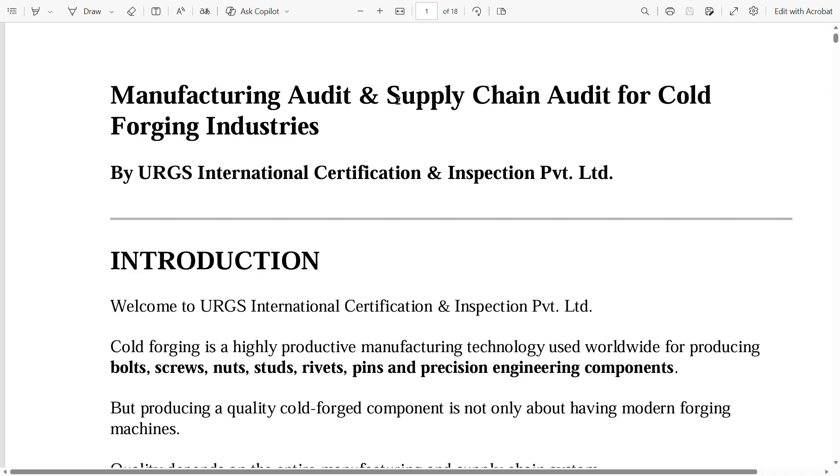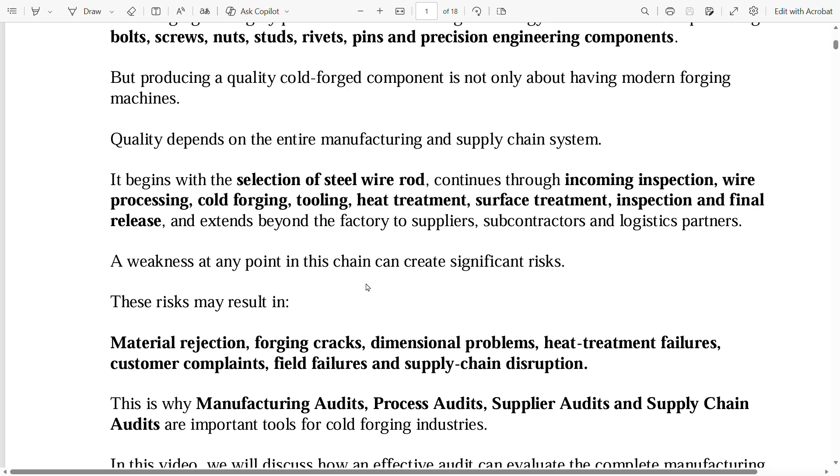Cold forging is a highly productive manufacturing technology used worldwide for producing bolts, screws, nuts, studs, rivets, pins, and precision engineering components. But producing a quality cold forged component is not only about having modern forging machines. Quality depends on the entire manufacturing and supply chain system. It begins with the selection of steel wire rod, continues through incoming inspection, wire processing, cold forging, tooling, heat treatment, surface treatment, inspection, and final release, and extends beyond the factory to suppliers, subcontractors, and logistic partners.

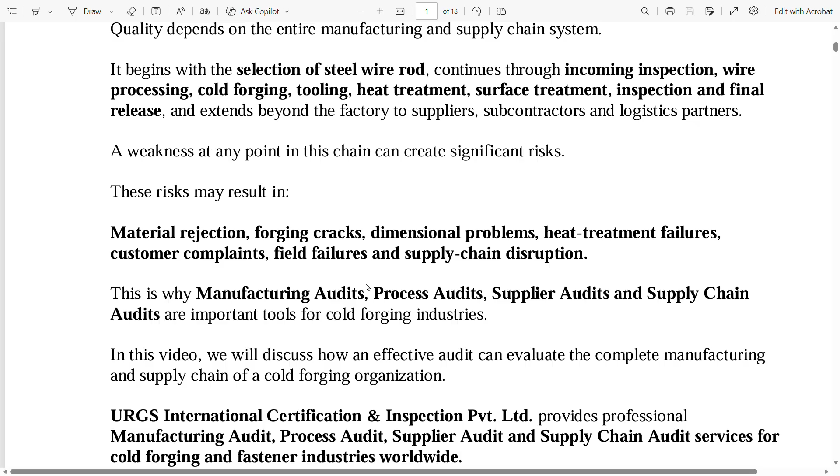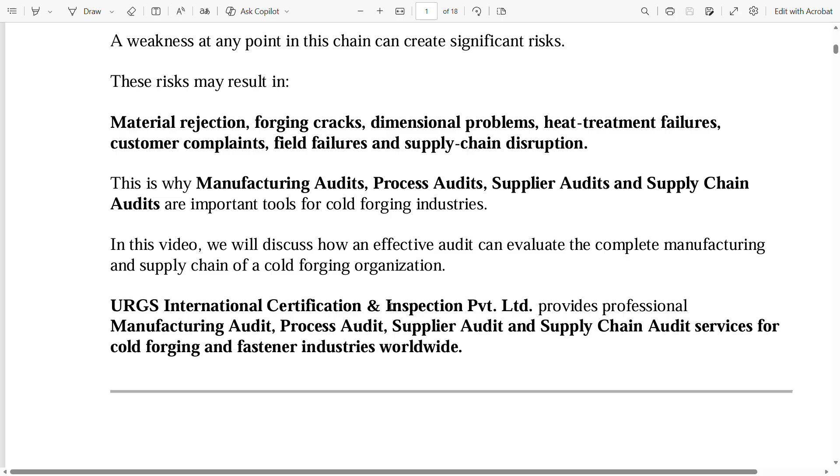A weakness at any point in this chain can create significant risks. These risks may result in material rejection, forging cracks, dimensional problems, heat treatment failures, customer complaints, field failures, and supply chain disruption. This is why manufacturing audits, process audits, supplier audits, and supply chain audits are important tools for cold forging industries. In this video, we will discuss how an effective audit can evaluate the complete manufacturing and supply chain of a cold forging organization.

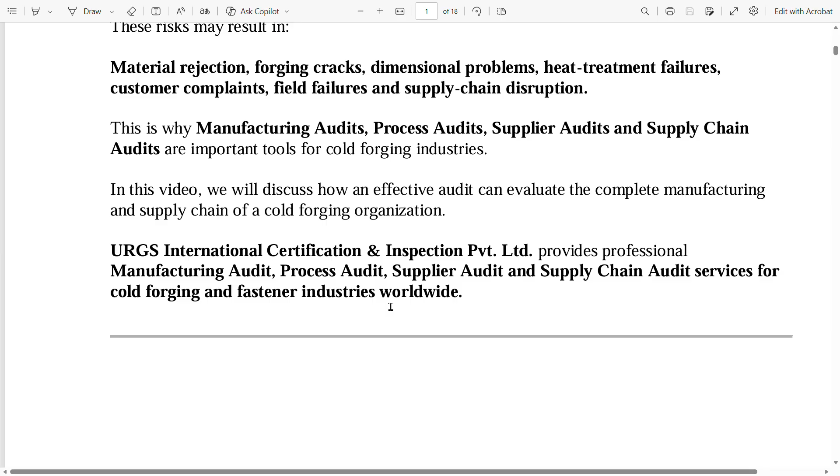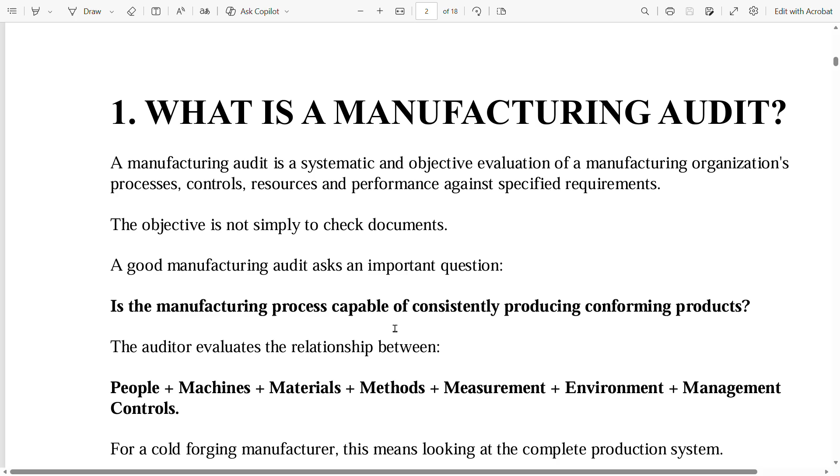What is a manufacturing audit? A manufacturing audit is a systematic and objective evaluation of a manufacturing organization's processes, controls, resources, and performance against specified requirements. The objective is not simply to check documents. A good manufacturing audit asks an important question: is the manufacturing process capable of consistently producing conforming products? The auditor evaluates the relationship between people plus machines plus materials plus methods plus measurement plus environment plus management controls.

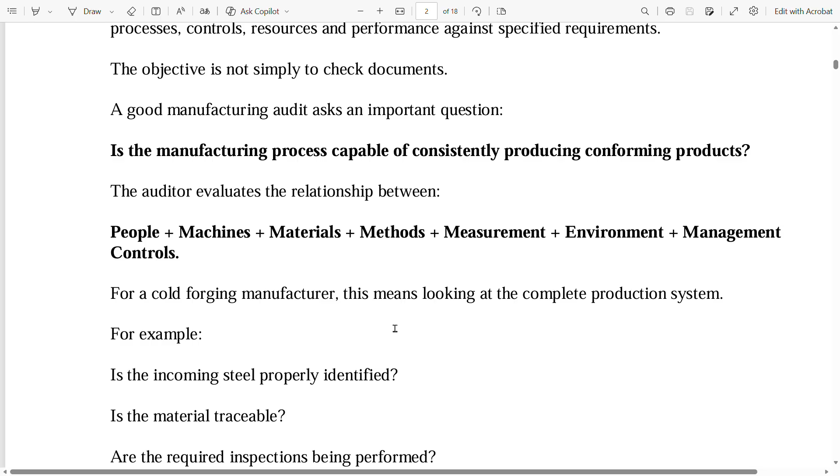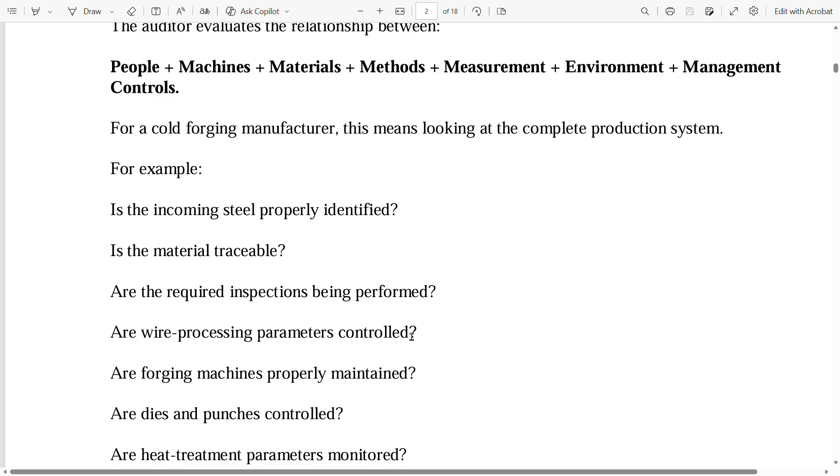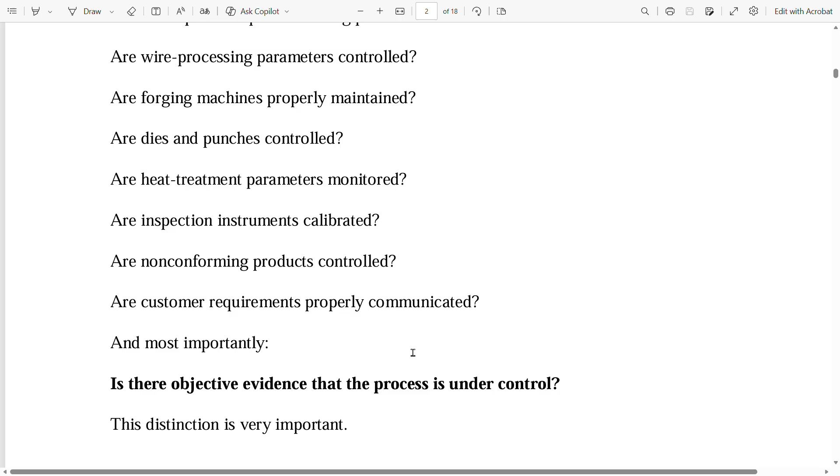For a cold forging manufacturer, this means looking at the complete production system. For example, is the incoming steel properly identified? Is the material traceable? Are the required inspections being performed? Are wire processing parameters controlled? Are forging machines properly maintained? Are dies and punches controlled? Are heat treatment parameters monitored? Are inspection instruments calibrated? Are non-conforming products controlled? Are customer requirements properly communicated? And most importantly, is there objective evidence that the process is under control?

This distinction is very important. An audit is not simply an inspection of products. An inspection determines whether a product meets specified requirements. An audit evaluates whether the system and processes used to produce that product are effectively controlled.

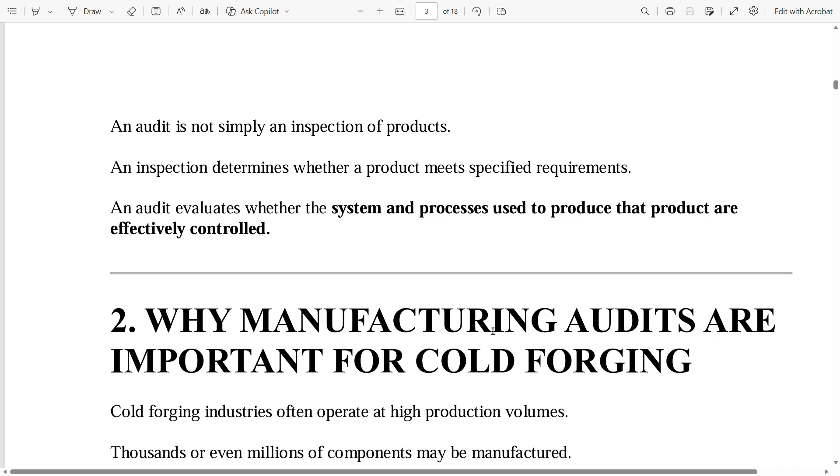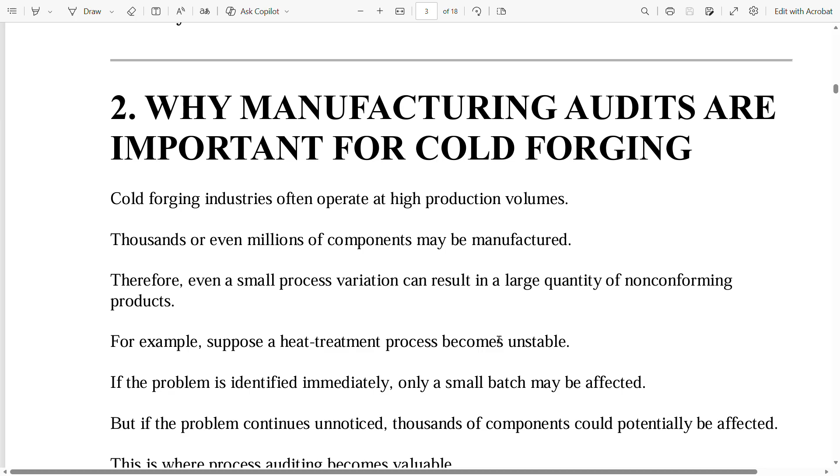Now next is why manufacturing audits are important for cold forging. Cold forging industries often operate at high production volumes. Thousands or even millions of components may be manufactured. Therefore, even a small process variation can result in a large quantity of non-conforming products. For example, suppose a heat treatment process becomes unstable. If the problem is identified immediately, only a small batch may be affected. But if the problem continues unnoticed, thousands of components could potentially be affected.

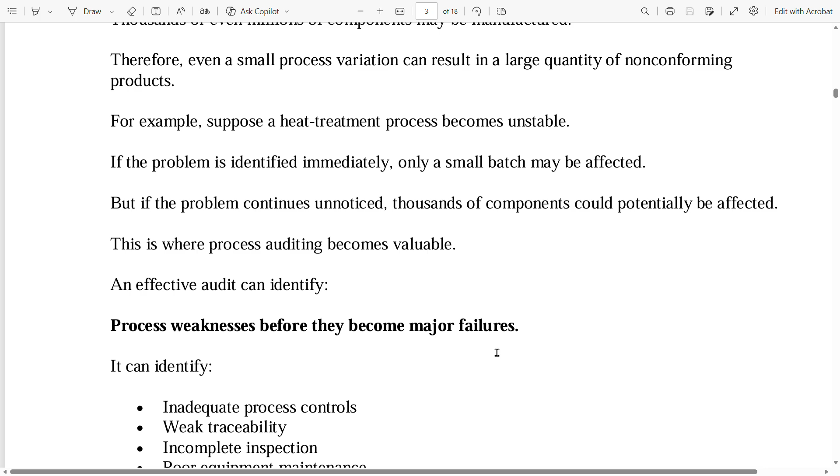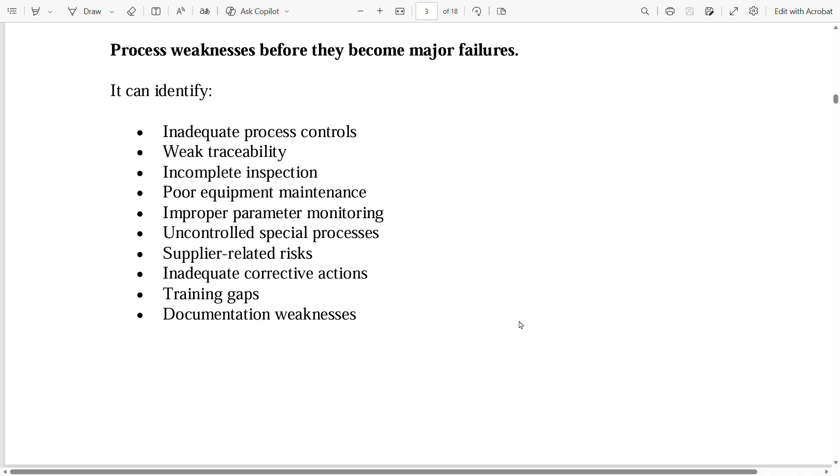This is where process auditing becomes valuable. An effective audit can identify process weaknesses before they become major failures. It can identify inadequate process controls, weak traceability, incomplete inspection, poor equipment maintenance, improper parameter monitoring, uncontrolled special processes, supplier-related risks, inadequate corrective actions, training gaps, and documentation weaknesses. The objective is therefore prevention rather than reaction. A strong audit system helps organizations move from detecting defects to preventing defects.

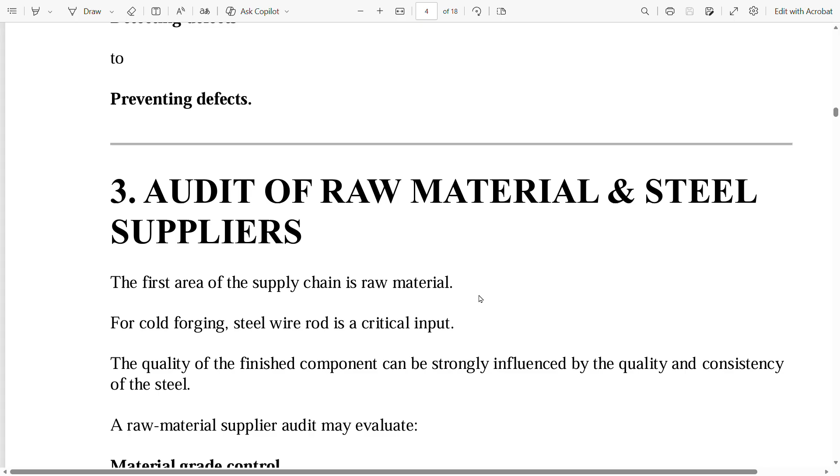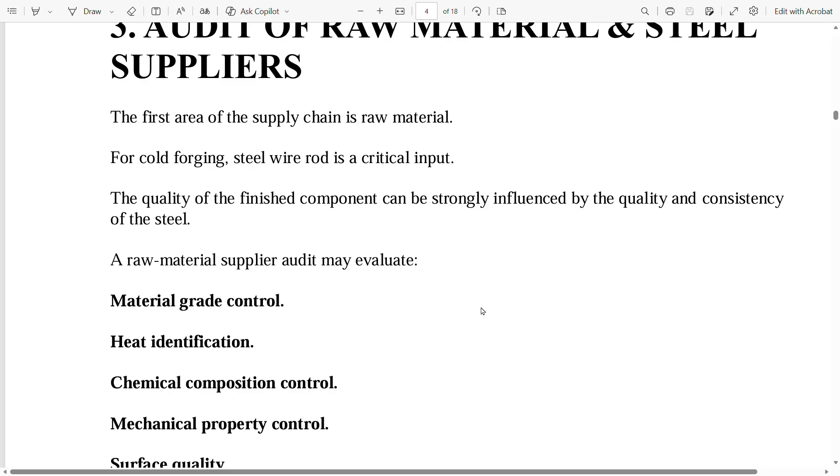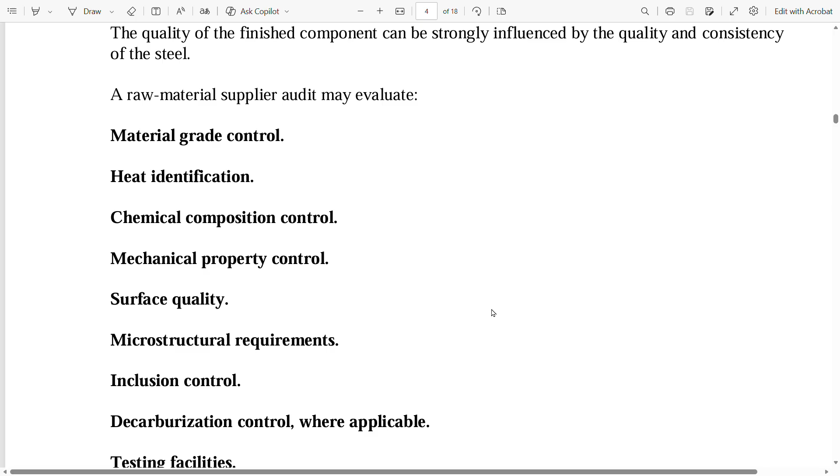The next is audit of raw material and steel suppliers. The first area of the supply chain is raw material. For cold forging, steel wire rod is a critical input. The quality of the finished component can be strongly influenced by the quality and consistency of the steel. A raw material supplier audit may evaluate material grade control, heat identification, chemical composition control, mechanical property control, surface quality, microstructural requirements, inclusion control, decarburization control where applicable, testing facilities, calibration of laboratory equipment, certificate and documentation controls, and traceability.

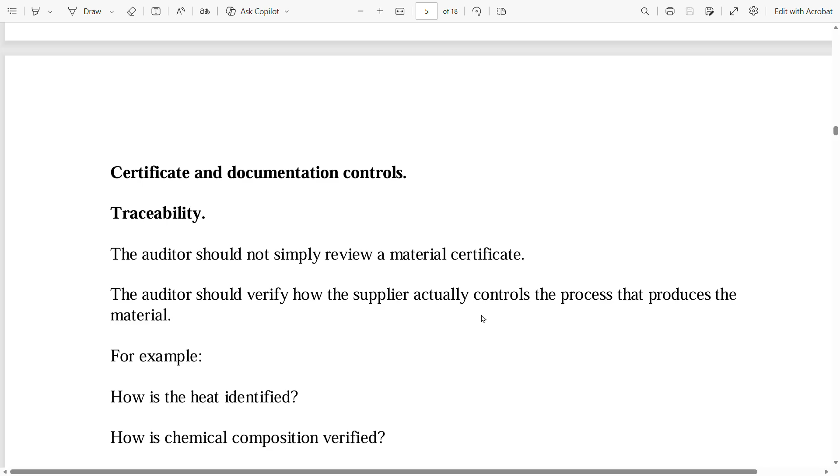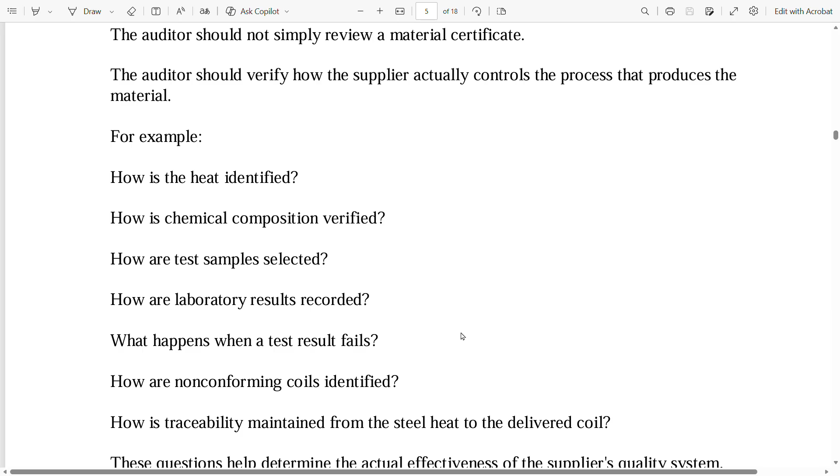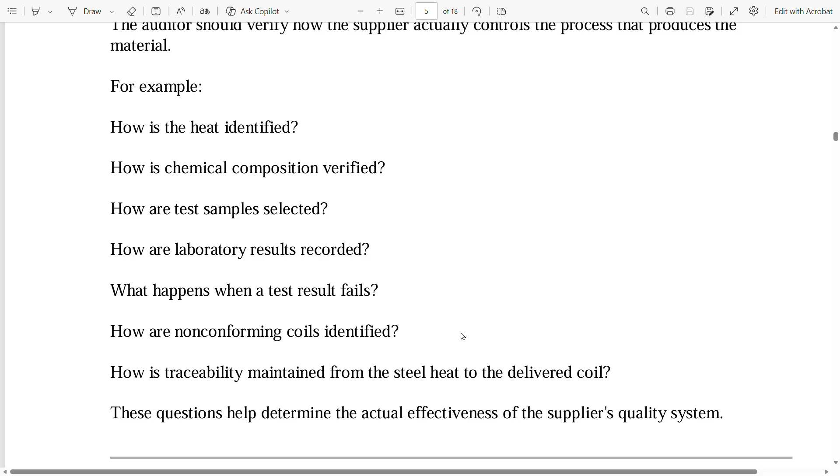The auditor should not simply review a material certificate. The auditor should verify how the supplier actually controls the process that produces the material. For example, how is the heat identified? How is the chemical composition verified? How are test samples selected? How are the laboratory results recorded? What happens when a test result fails? How are non-conforming coils identified? How is traceability maintained from the steel heat to the delivered coil? These questions help determine the actual effectiveness of the supplier's quality system.

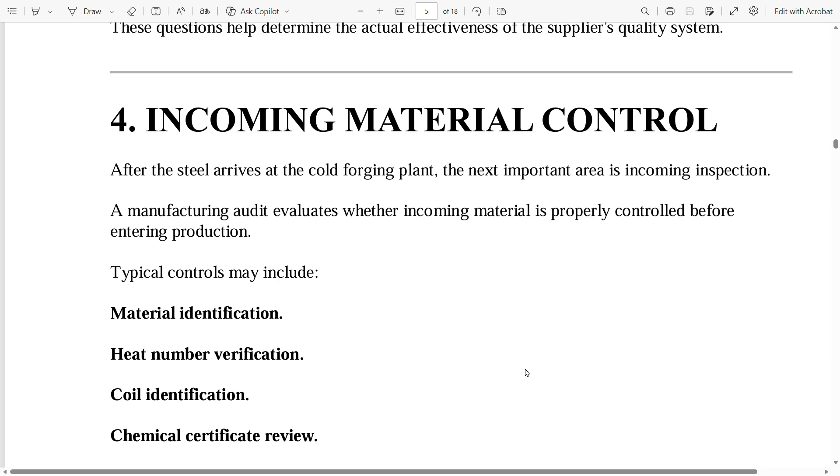Now next is incoming material control. After the steel arrives at the cold forging plant, the next important area is incoming inspection. A manufacturing audit evaluates whether incoming material is properly controlled before entering production.

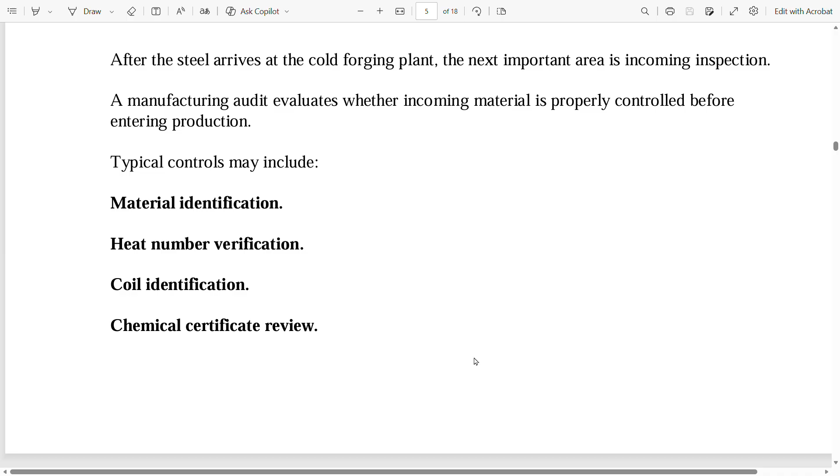Typical controls may include material identification, heat number verification, coil identification, chemical certificate review, dimensional verification, surface inspection, mechanical testing where required, metallurgical examination where specified, and acceptance and rejection criteria.

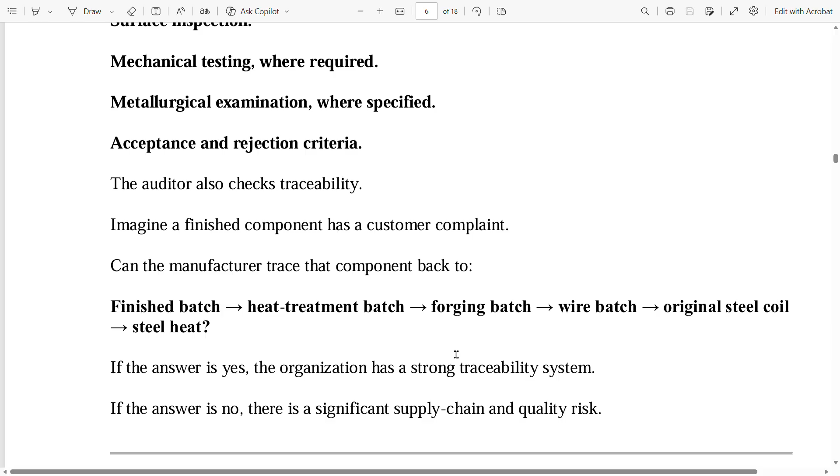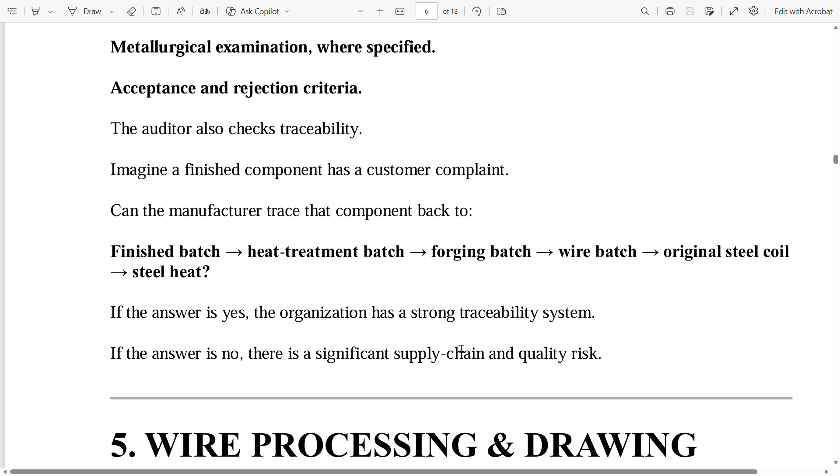The auditors also check traceability. Imagine a finished component has a customer complaint. Can the manufacturer trace that component back to finished batch, to heat treatment batch, to forging batch, to wire batch, to original steel coil, and at last to steel heat? If the answer is yes, the organization has a strong traceability system. If the answer is no, there is significant supply chain and quality risk.

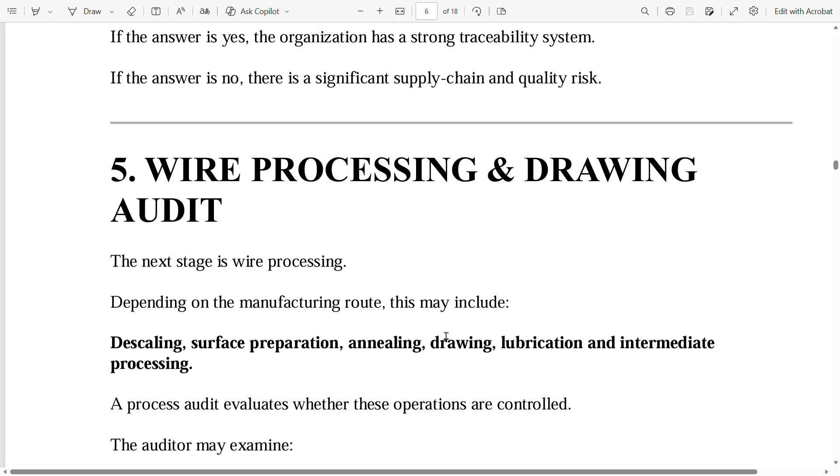Now fifth, wire processing and drawing audit. The next stage is wire processing. Depending on the manufacturing route, this may include descaling, surface preparation, annealing, drawing, lubrication, and intermediate processing.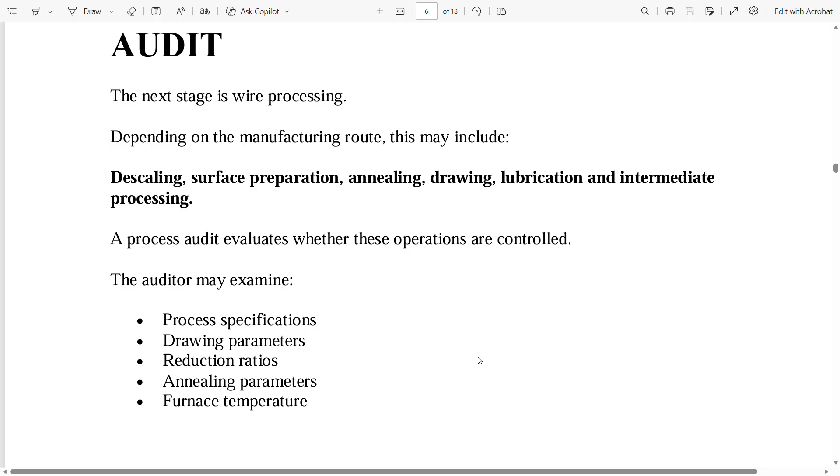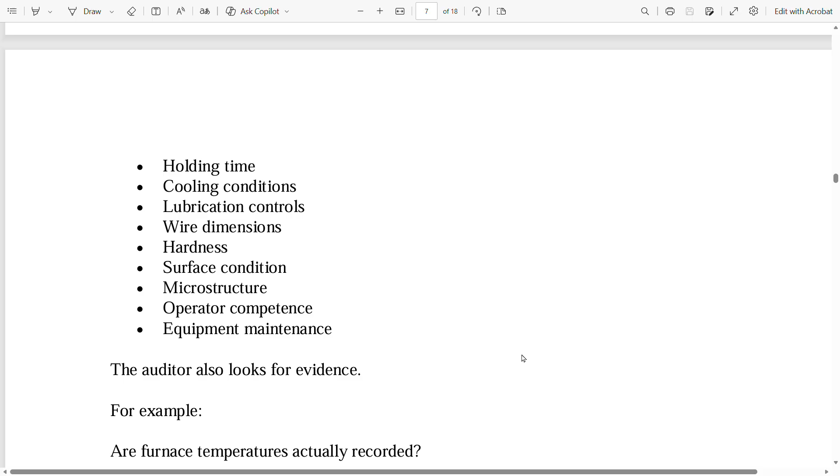A process audit evaluates whether these operations are controlled. The auditor may examine process specifications, drawing parameters, reduction ratios, annealing parameters, furnace temperature, holding time, cooling conditions, lubrication controls, wire dimensions, hardness, surface condition, microstructure, operator competence, and equipment maintenance.

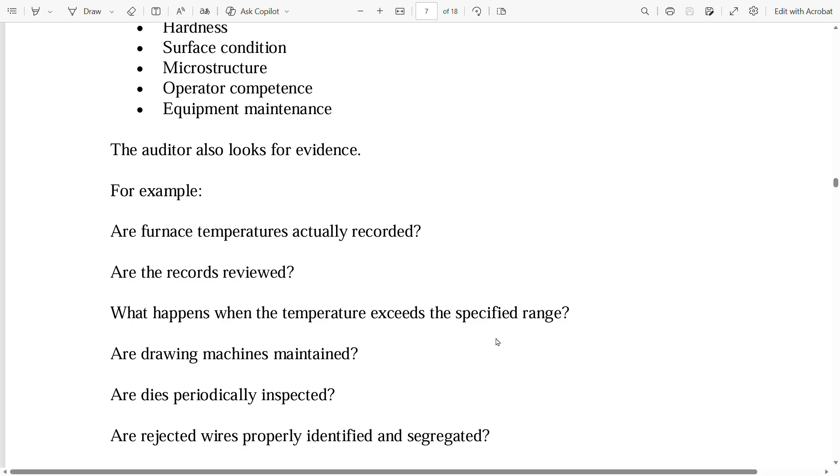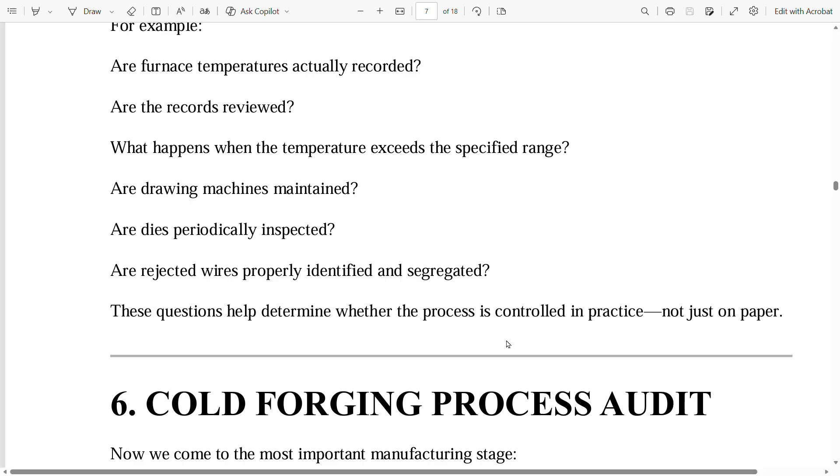The auditor also looks for evidence. For example, are furnace temperatures actually recorded? Are the records reviewed? What happens when the temperature exceeds the specified range? Are drawing machines maintained? Are dies periodically inspected? Are rejected wires properly identified and segregated? These questions help determine whether the process is controlled in practice, not just on paper.

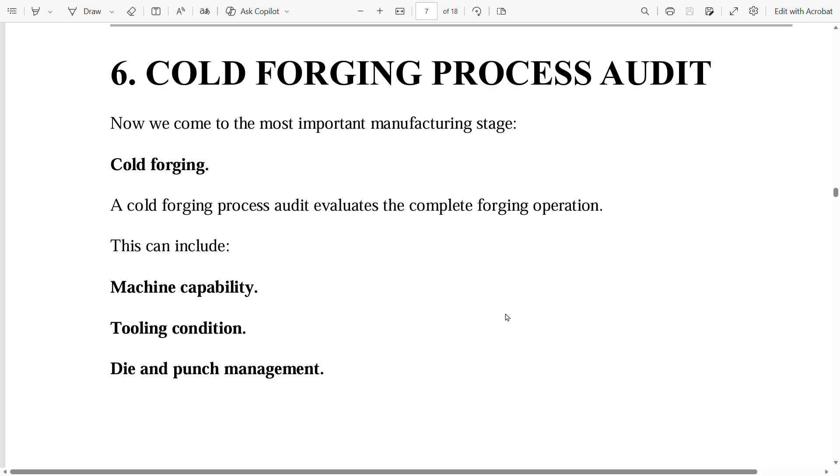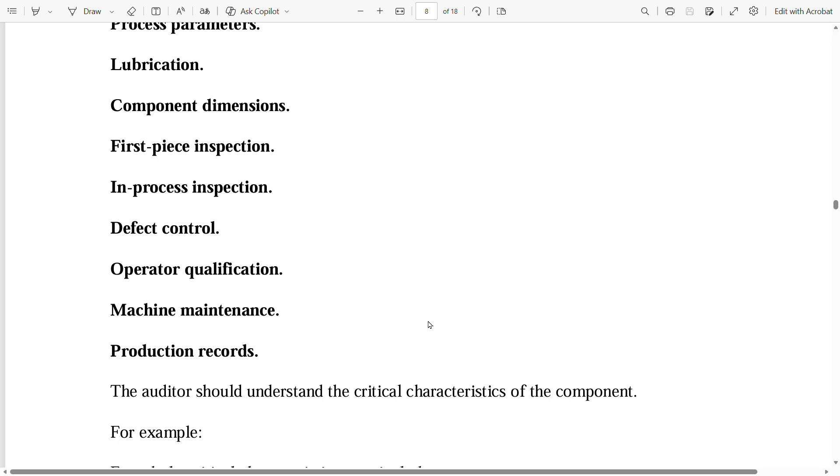Then next is cold forging process audit. Now we come to the most important manufacturing stage, cold forging. A cold forging process audit evaluates the complete forging operation. This can include machine capability, tooling condition, die and punch management, process parameters, lubrication, component dimensions, first piece inspection, in-process inspection, defect control, operator qualification, machine maintenance, and production records.

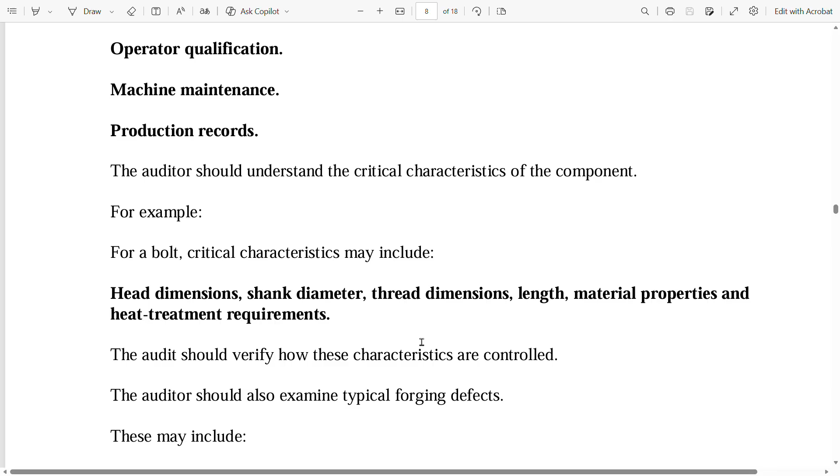The auditor should understand the critical characteristics of the component. For example, for a bolt, critical characteristics may include head dimensions, shank diameter, thread dimensions, length, material properties, and heat treatment requirements. The audit should verify how these characteristics are controlled.

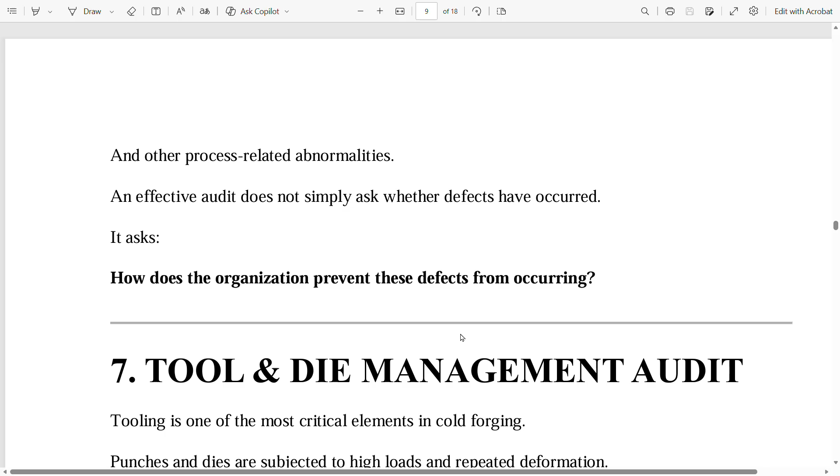The auditor should also examine typical forging defects. These may include laps, folds, cracks, underfill, overfill, surface defects, dimensional variation, and other process-related abnormalities. An effective audit does not simply ask whether defects have occurred, it asks how the organization prevents these defects from occurring. The next is tool and die management audit.

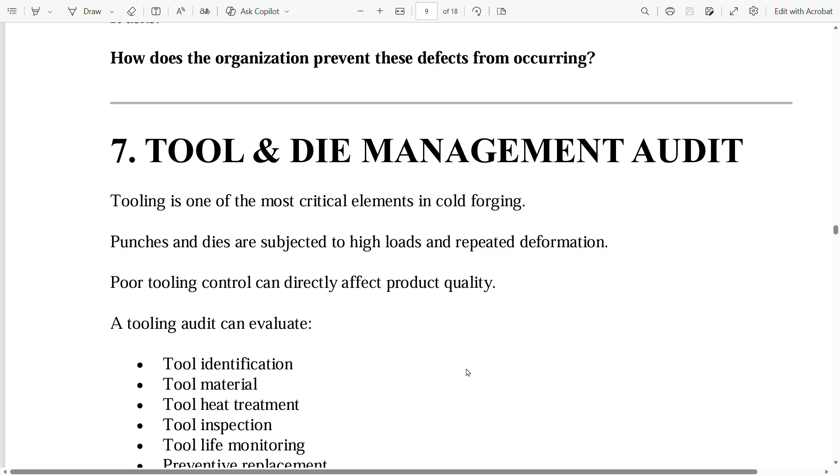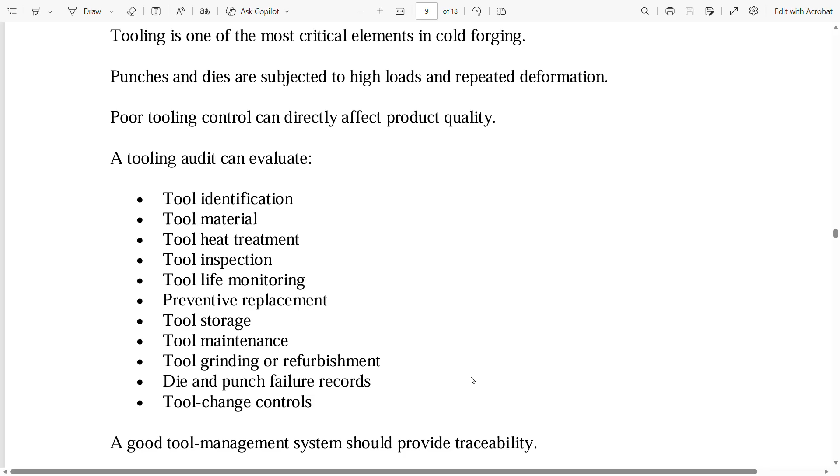Tooling is one of the most critical elements in cold forging. Punches and dies are subjected to high loads and repeated deformation. Poor tooling control can directly affect product quality. A tooling audit can evaluate tool identification, tool material, tool heat treatment, tool inspection, tool life monitoring, preventive replacement, tool storage, tool maintenance, tool grinding or refurbishment, die and punch failure records, and tool change controls.

A good tool management system should provide traceability. The organization should know which tool was used for which product and for how many components, when it was inspected, when it was replaced, and why it failed.

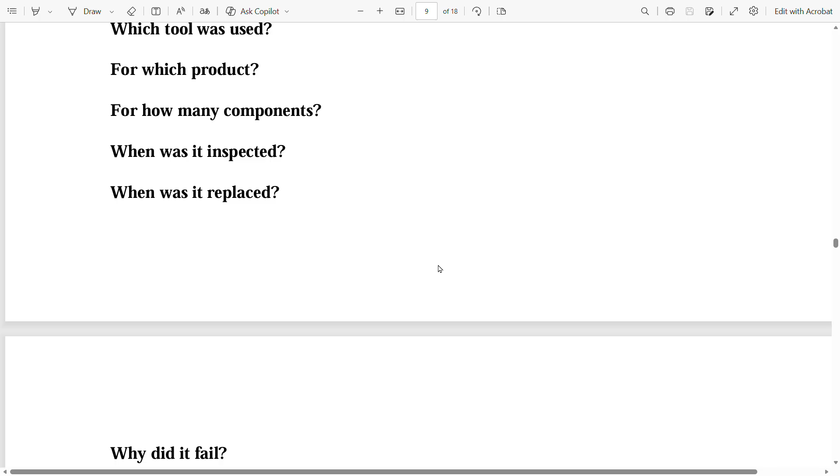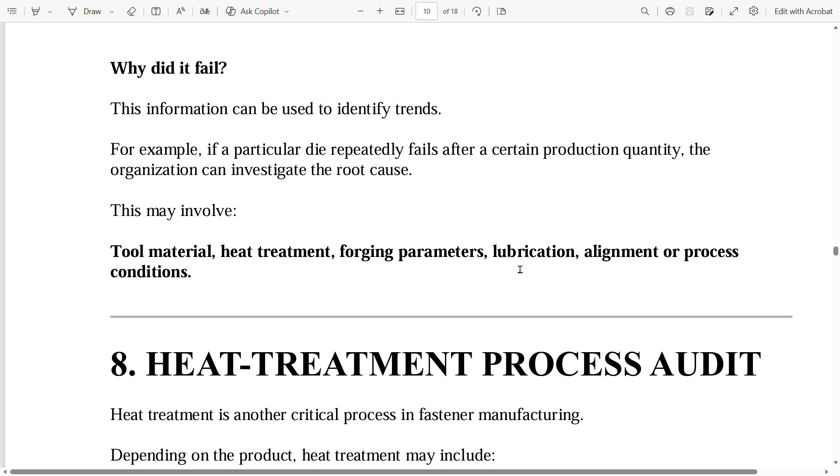This information can be used to identify trends. For example, if a particular die repeatedly fails after a certain production quantity, the organization can investigate the root cause. This may involve tool material, heat treatment, forging parameters, lubrication, alignment, or process conditions.

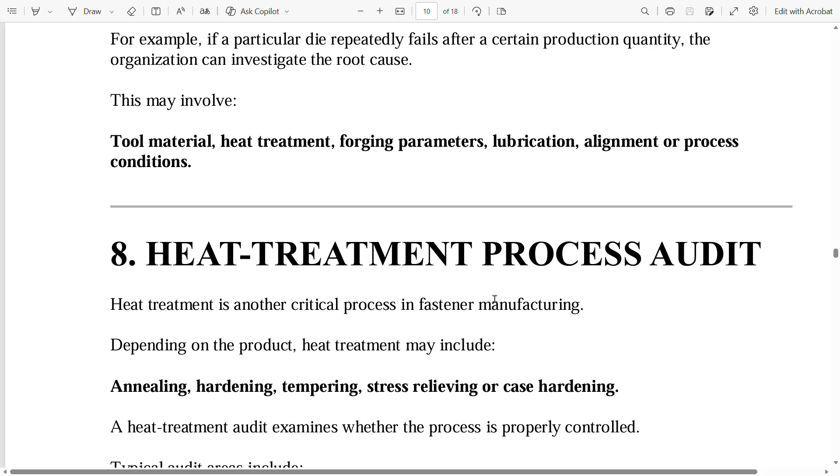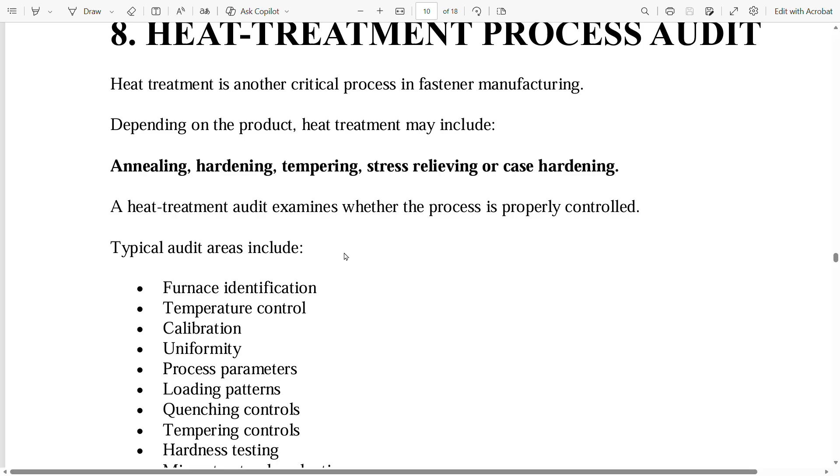And next is heat treatment process audit. Heat treatment is another critical process in fastener manufacturing. Depending on the product, heat treatment may include annealing, hardening, tempering, stress relieving, or case hardening. A heat treatment audit examines whether the process is properly controlled.

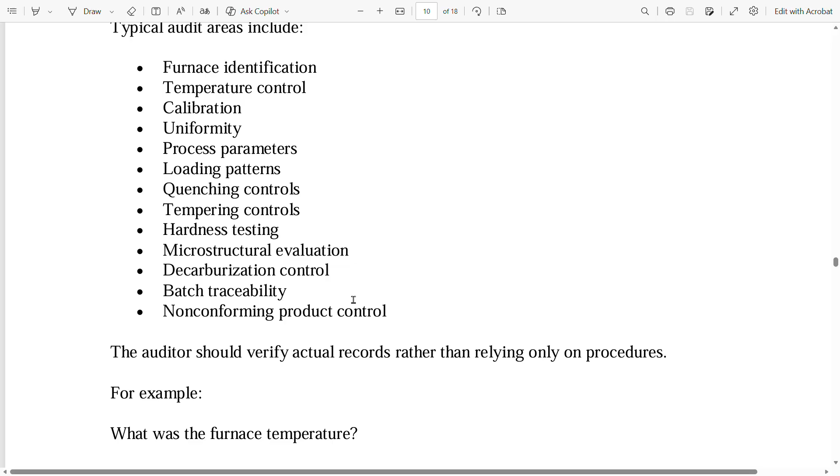Typical audit areas include furnace identification, temperature control, calibration, uniformity, process parameters, loading patterns, quenching controls, tempering controls, hardness testing, microstructural evaluation, decarburization control, batch traceability, and non-conforming product control. The auditor should verify actual records rather than relying only on procedures.

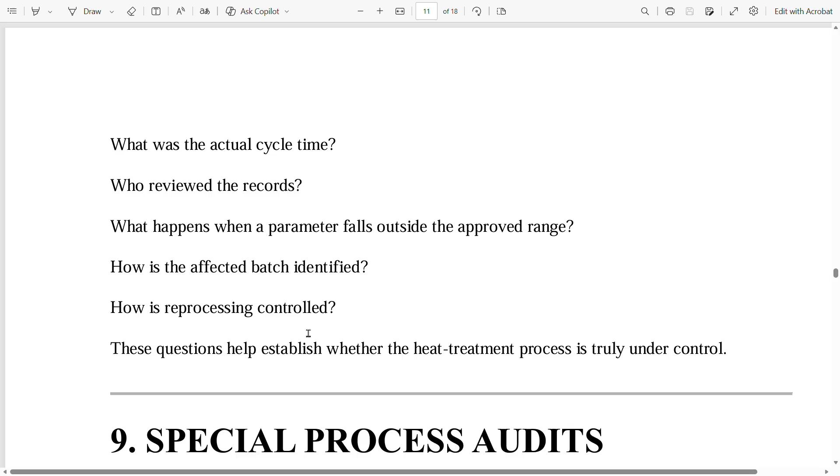For example, what was the furnace temperature? What was the actual cycle time? Who reviewed the records? What happens when a parameter falls outside the approved range? How is the affected batch identified? How is reprocessing controlled? These questions help establish whether the heat treatment process is truly under control.

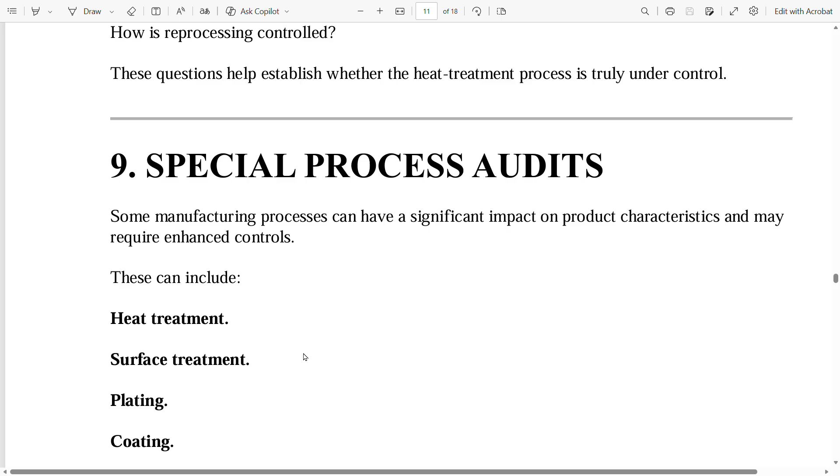Next is ninth, special process audits. Some manufacturing processes can have a significant impact on product characteristics and may require enhanced controls. These can include heat treatment, surface treatment, plating, coating, cleaning, and special machining or processing operations.

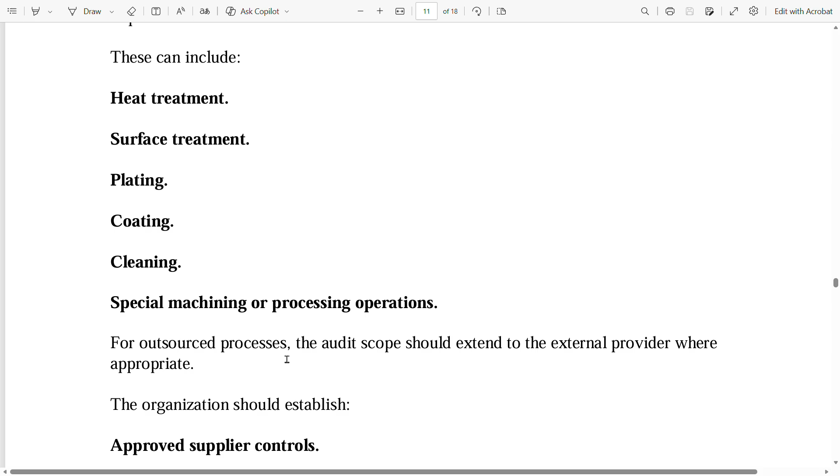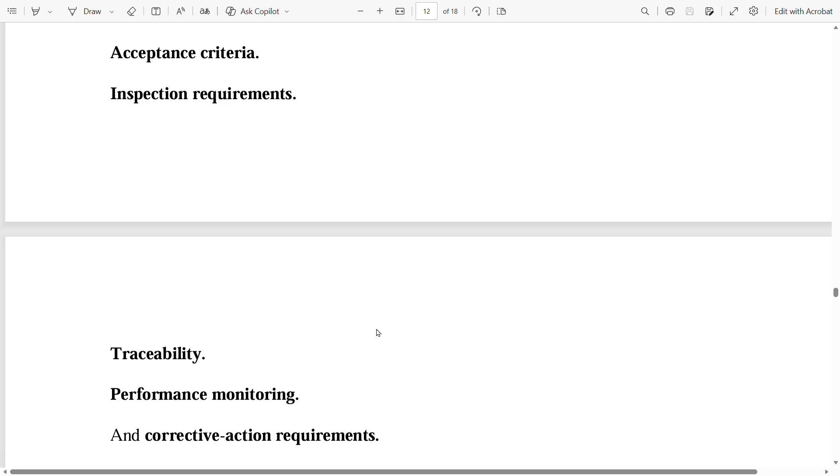For outsourced processes, the audit scope should extend to the external provider where appropriate. The organization should establish approved supplier controls, process specifications, acceptance criteria, inspection requirements, traceability, performance monitoring, and corrective action requirements. For example, if a surface treatment process is outsourced, the manufacturer should have controls to ensure that the external provider consistently meets the specified requirements. The audit should verify whether these controls are actually effective.

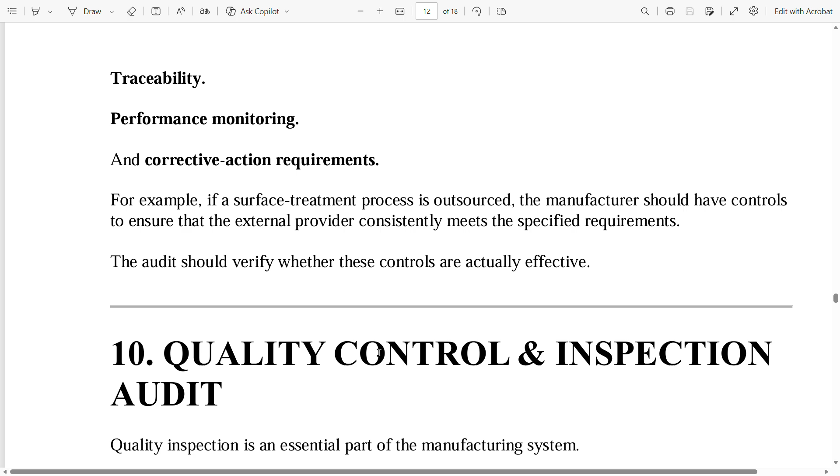Next is quality control and inspection audit. Quality inspection is an essential part of the manufacturing system. However, inspection alone does not create quality. Quality must be built into the process.

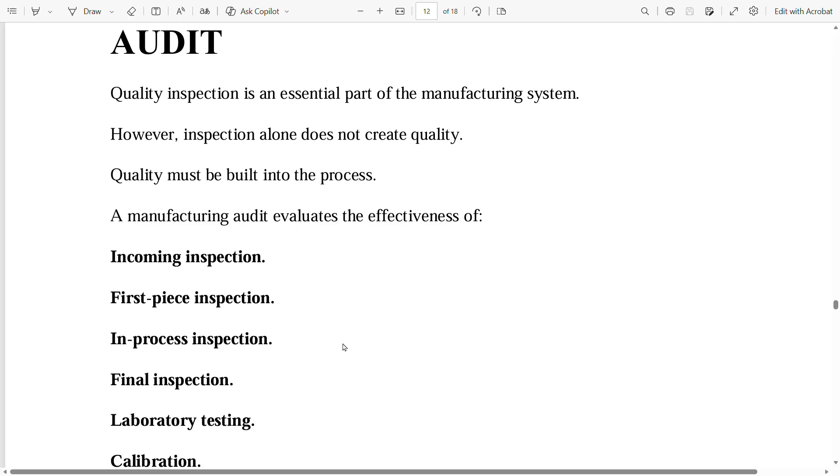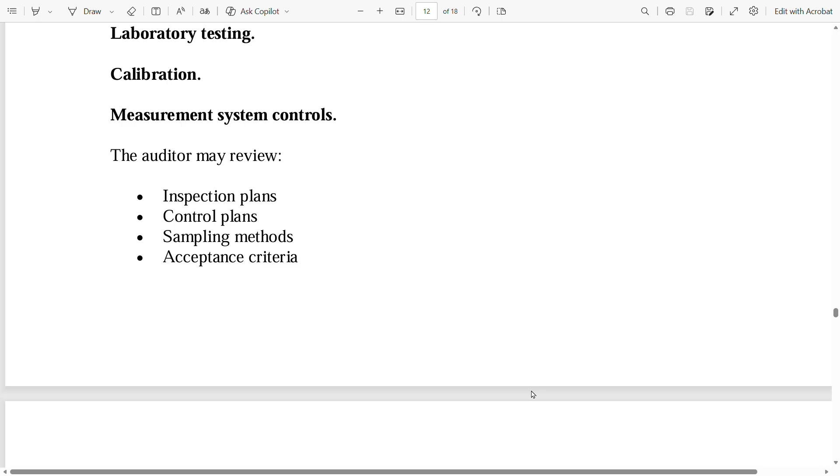A manufacturing audit evaluates the effectiveness of incoming inspection, first piece inspection, in-process inspection, final inspection, laboratory testing, calibration, and measurement system controls. The auditor may review inspection plans, control plans, sampling methods, acceptance criteria, inspection records, test methods, calibration certificates, non-conforming product controls, and release authorization.

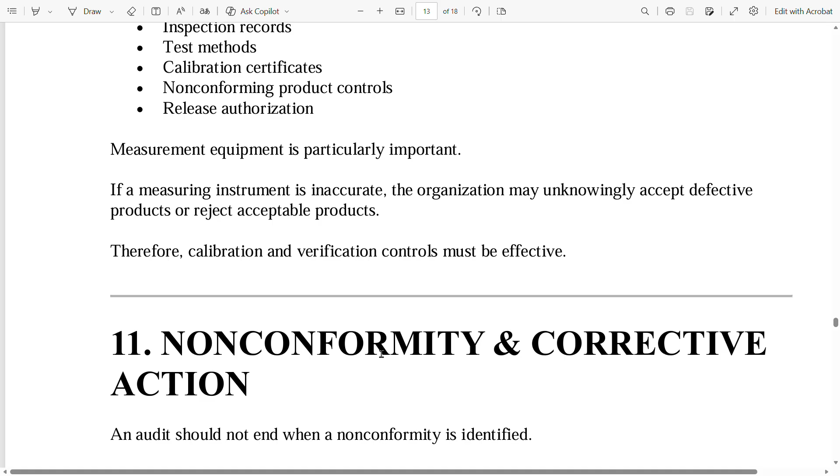Measurement equipment is particularly important. If a measuring instrument is inaccurate, the organization may unknowingly accept defective products or reject acceptable products. Therefore, calibration and verification controls must be effective.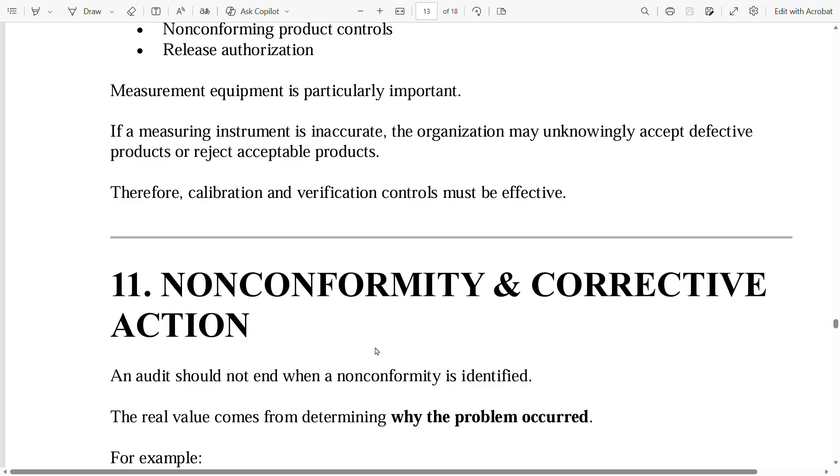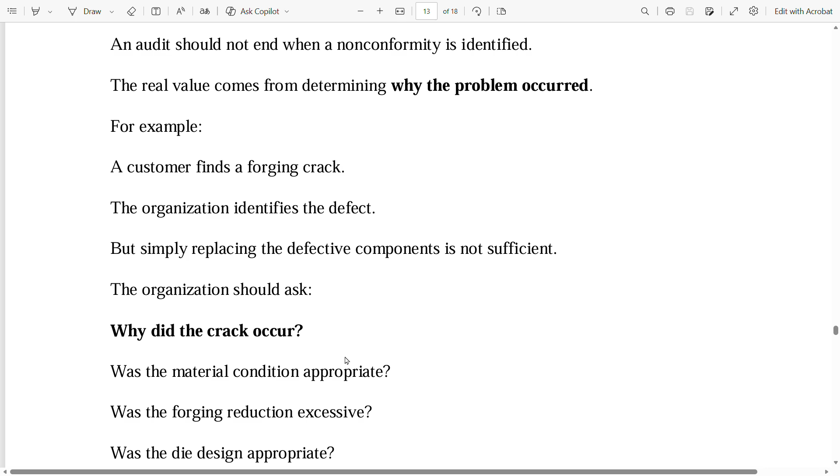Next is non-conformity and corrective action. An audit should not end when a non-conformity is identified. The real value comes from determining why the problem occurred. For example, a customer finds a forging crack. The organization identifies the defect, but simply replacing the defective components is not sufficient.

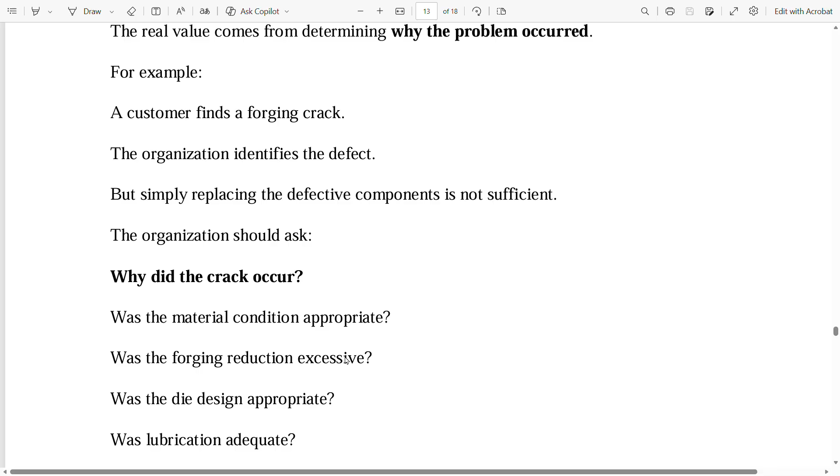The organization should ask, why did the crack occur? Was the material condition appropriate? Was the forging reduction excessive? Was the die design appropriate? Was lubrication adequate? Was the wire annealing condition correct? Was there a material defect? Was the process parameter outside the approved range?

This is where root cause analysis becomes essential. Corrective action should address the actual cause. An effective audit therefore evaluates problem to containment to root cause to corrective action, to verification of effectiveness. Okay, then next is supply chain audit.

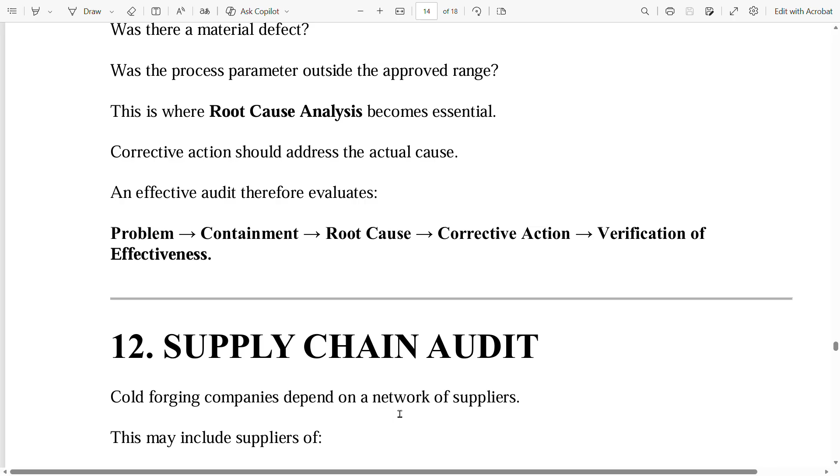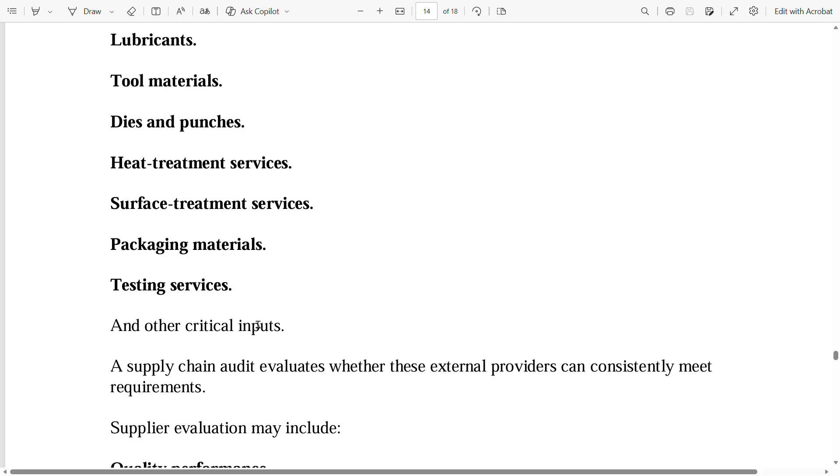Cold forging companies depend on a network of suppliers. This may include suppliers of steel wire rod, lubricants, tool materials, dies and punches, heat treatment services, surface treatment services, packaging materials, testing services, and other critical inputs. A supply chain audit evaluates whether these external providers can consistently meet requirements.

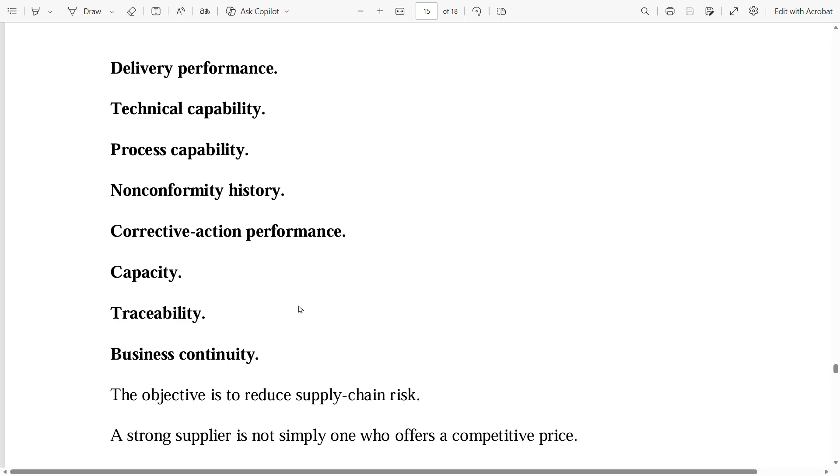Supplier evaluation may include quality performance, delivery performance, technical capability, process capability, non-conformity history, corrective action performance, capacity, traceability, and business continuity. The objective is to reduce supply chain risk. A strong supplier is not simply one who offers a competitive price. A strong supplier should demonstrate capability plus consistency plus quality plus delivery plus traceability plus continuous improvement.

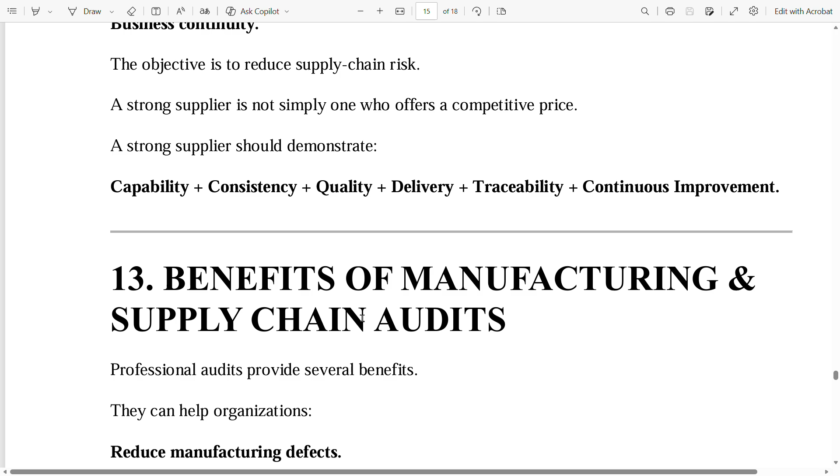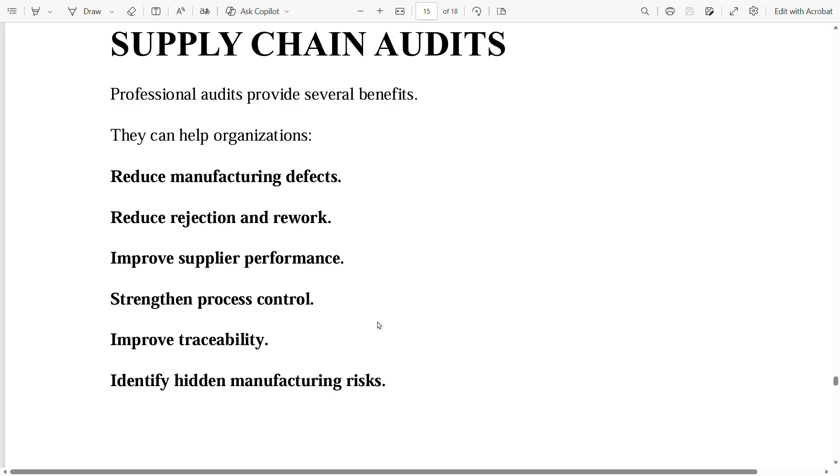Now, 13 benefits of manufacturing and supply chain audits. Professional audits provide several benefits. They can help organizations reduce manufacturing defects, reduce rejection and rework, improve supplier performance, strengthen process control, improve traceability, identify hidden manufacturing risks, improve customer confidence, prevent recurring non-conformities, strengthen the supply chain, and ultimately improve product quality and business performance.

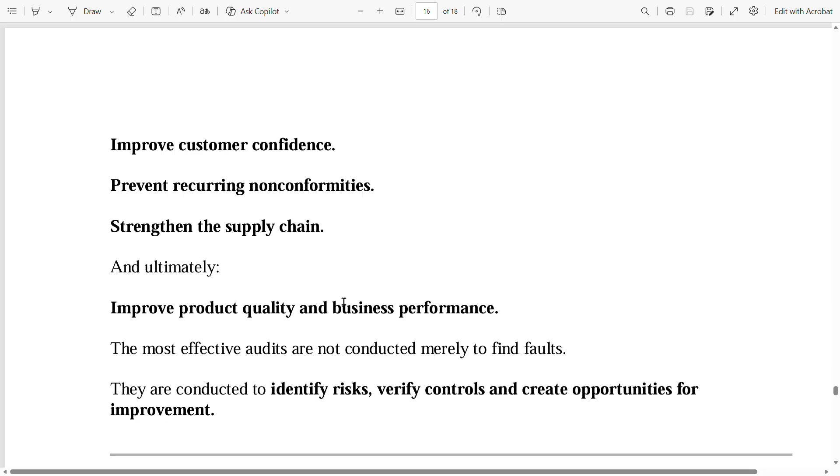The most effective audits are not conducted merely to find faults. They are conducted to identify risks, verify controls, and create opportunities for improvement.

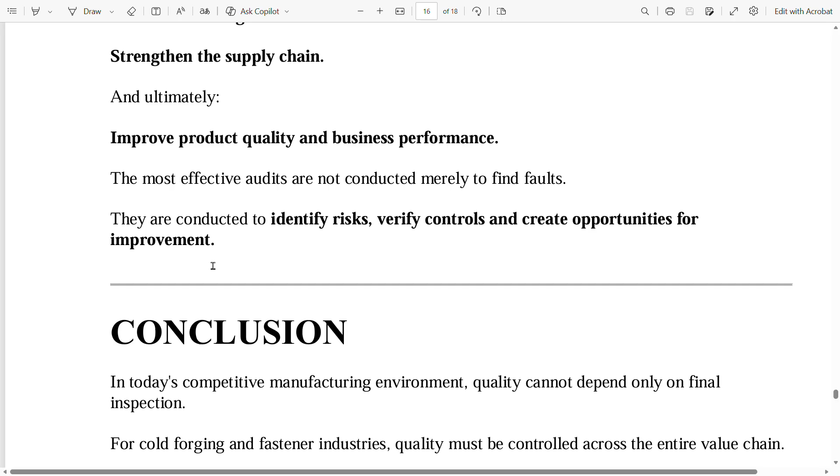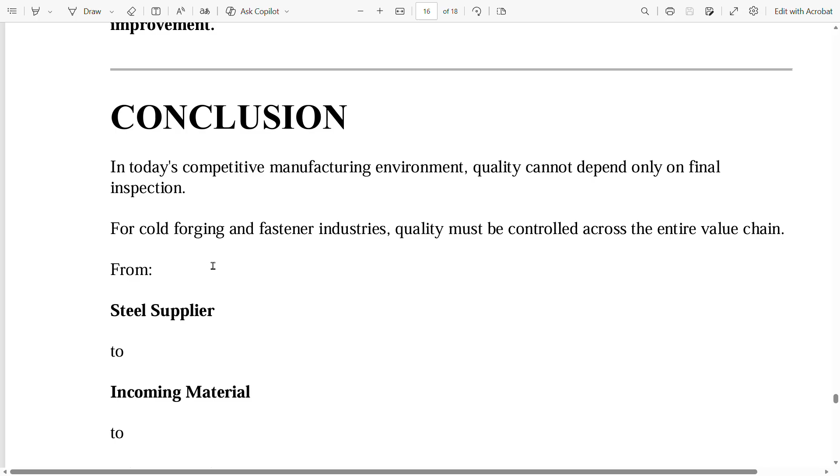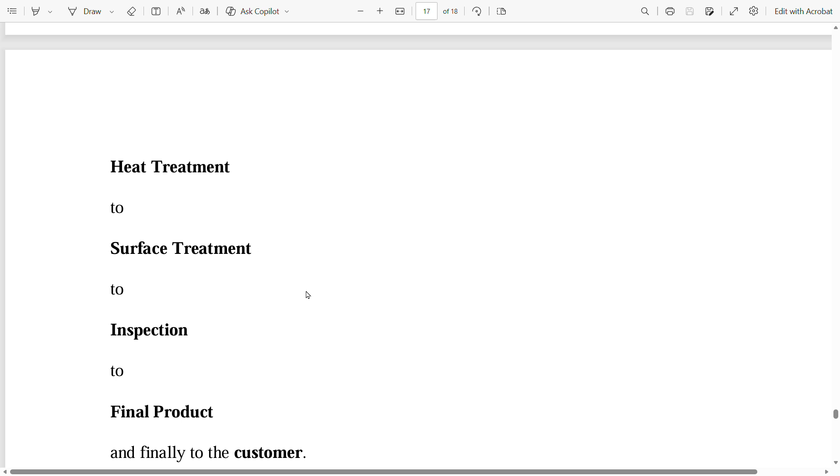Now, at last, conclusion. In today's competitive manufacturing environment, quality cannot depend only on final inspection. For cold forging and fastener industries, quality must be controlled across the entire value chain, from steel supplier to incoming material to wire processing to cold forging to tooling to heat treatment to surface treatment to inspection to final product and finally to the customer. A professional manufacturing audit and supply chain audit provides an independent and systematic approach to evaluating these processes.